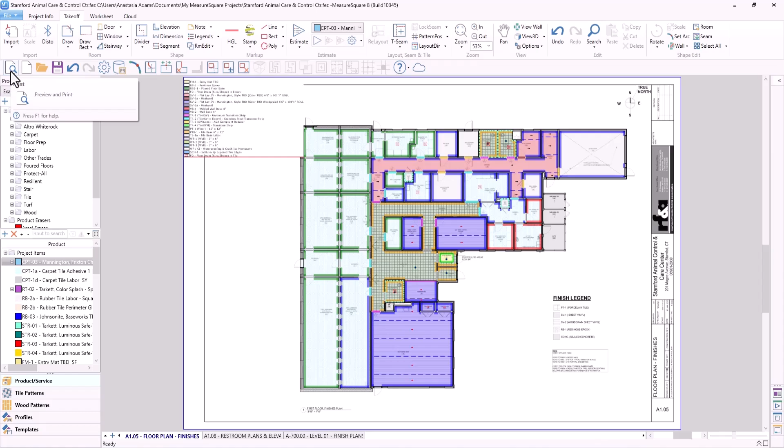So as you can see, I'm in the same animal control project that we've been working in. We want to start with making sure that everything is perfect on our takeoff. We have a legend, so the install crew knows exactly what each of these colors mean, what it is, what size it is. And then once we've verified those things, all you need to do is either navigate to the print icon in your toolbar or come up to File and select Print.

This will open up your print options, and as you can see, you have several options. One thing to note is up here in the upper right hand corner, we have a couple of options. This is what's called a print profile. So if you find you like a specific layout for either your quantities or your diagram or your proposal, whatever sort of printout you want, you can save that as a print profile by clicking this blue plus.

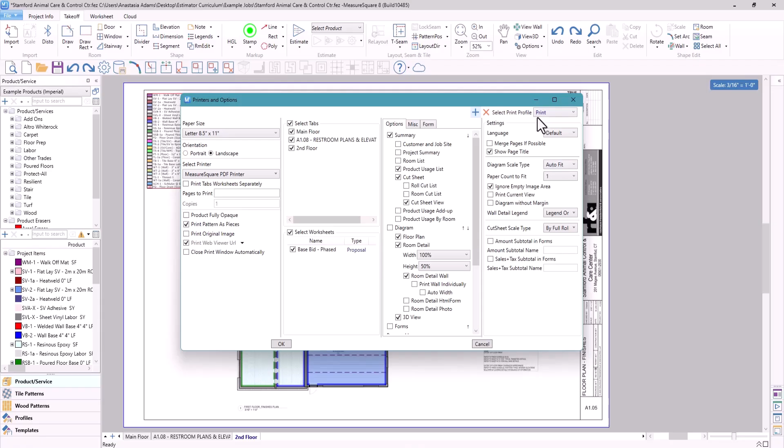I'm going to call it print, and I'll say OK. Now it is in the print profile. I can change my paper size to whatever size I want. If I wanted to print this out at the native scale, I might start with an Arch E and see where that lays out. If that's too big, I can narrow it down to a smaller paper size. If I want this to be nice and readable for somebody in the office, maybe I want to choose an 11 by 17. Always going to recommend a landscape orientation so that you are mirroring what you are getting from your architect.

For the printer, highly recommend always printing to the MeasureSquare PDF printer. This is to ensure that you are getting the crispest lines, the darkest text, all the things necessary for the output. From there, print the created PDF from MeasureSquare PDF printer to your physical printer. This will ensure there are no issues with printing.

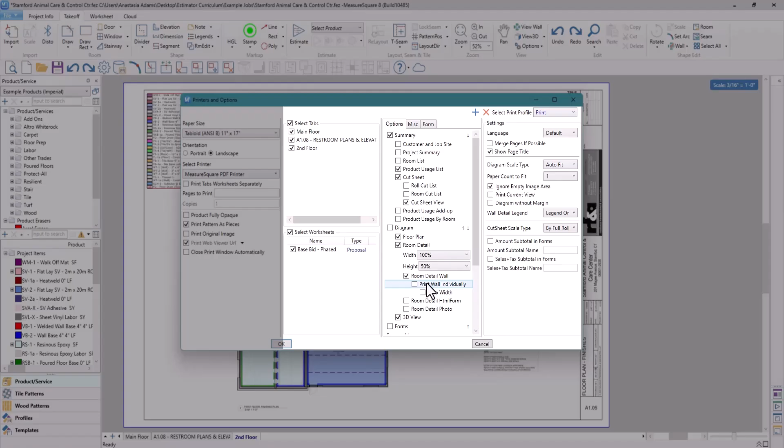So once I've gotten all of my setup the way I want it, I've turned things on and off accordingly. I can go ahead and click OK, and the system will give me a print preview. This is to ensure I am printing exactly what I want to print.

Now, notice I have no drawing. If I go to printers and settings within the print preview, notice it pulls up all of the same options from what I had in the previous view. This is to allow any user to adjust on the fly specifically what they need or want.

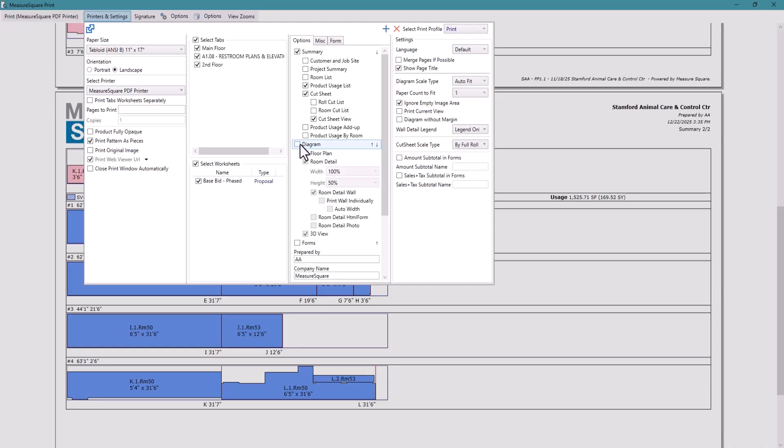So if I want the diagram, I'm going to check diagram. Notice I currently have floor plan, room detail view with room detail wall, and the 3D view all currently checked, but notice how they are gray. That is due to a hierarchy of options. When I turn on diagram, all of these checkboxes will become live. Same thing with room detail wall. If I turn off room detail, notice how it grays out all of these options. This is part of the hierarchy of options that we have here within the system.

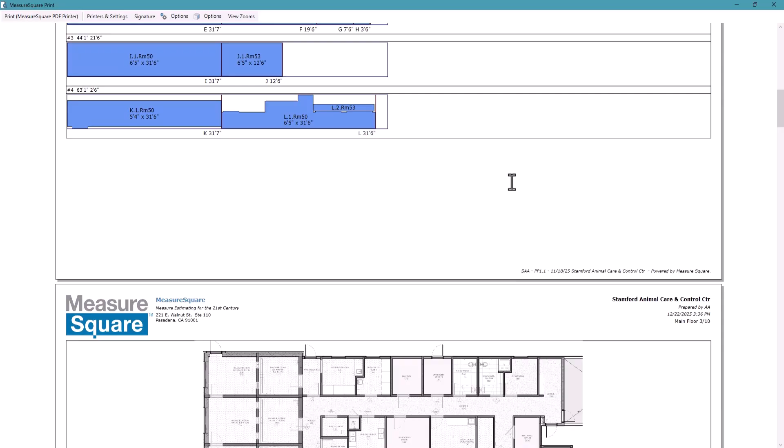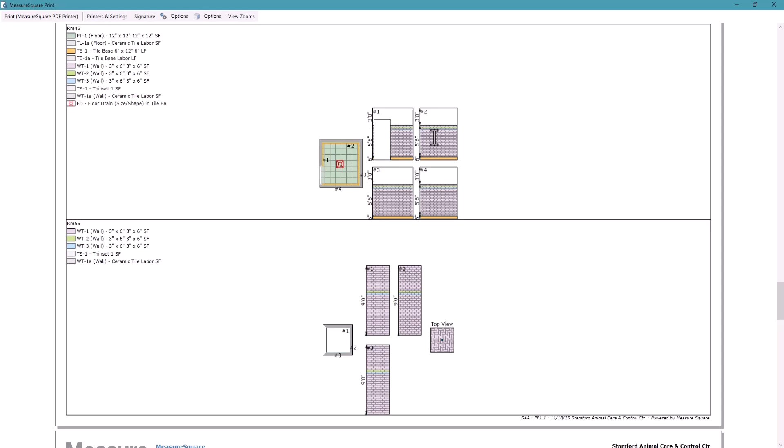So if I scroll down, notice here's all of my tabs. I have the floor plan and the 3D view since I have nothing applied to the walls. Here is another tab of information that I have - again, the floor plan. Here's my room detail view with my floor plan, small walls outlined. Here's my walls exploded - this is my room detail wall, along with a legend. This is part of the wall detail legend option here.

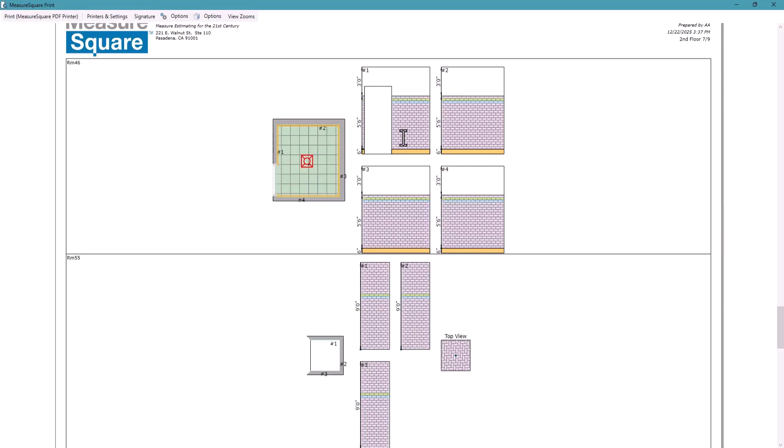If I change this to legend usage, it's going to provide the usage quantities for these materials. Vice versa, if I turn this to none, notice it gets rid of that legend, makes my drawing a little bigger, but it doesn't specify what any of these materials are. So for me, I think legend only is the perfect option because it tells the installer what products go in here, how big they are, where they go if it's floor or wall.

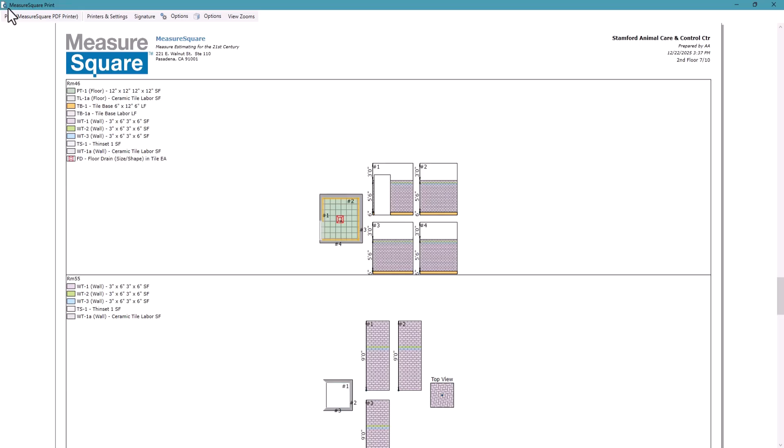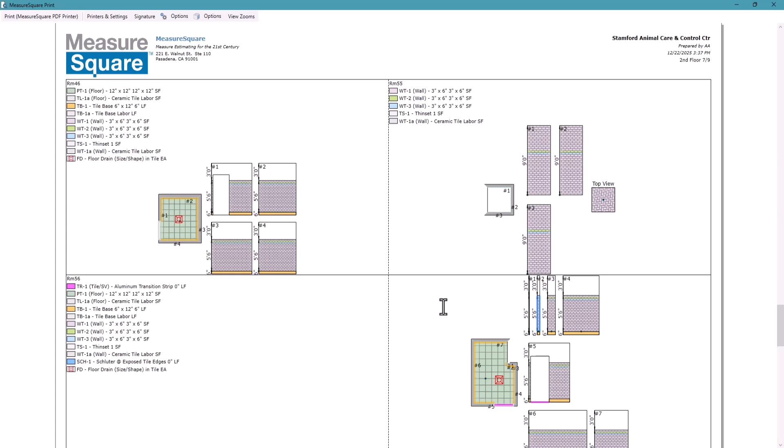But you can see that it made it 50 by 50, right? 50% wide, 50% tall. For me, I like 100% width, 50% height - so I'm getting 2 rooms. It's very clear which legend goes to which walls. It just makes it nice and clear.

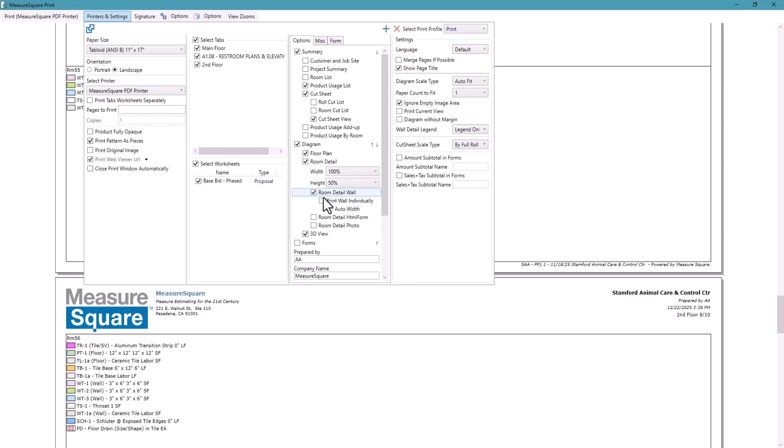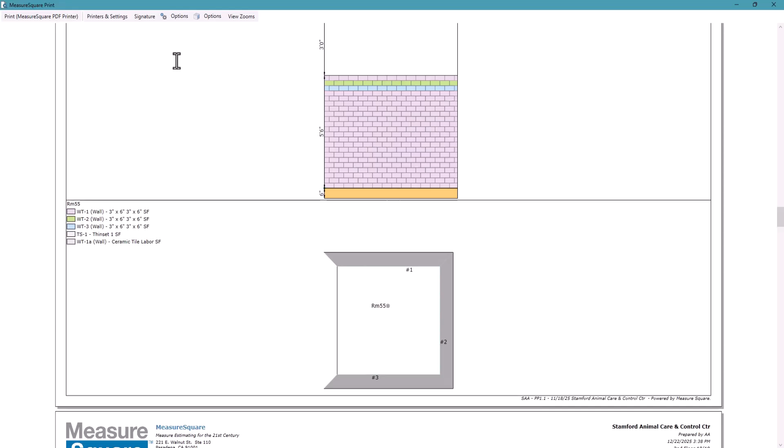Next, this option here prints a wall individually. Some folks like this, but me personally, I do not. I feel like it gets a little convoluted. If I turn that on, it makes the walls nice and big and clean. You can really see the wall stacks for either. But then you get into something like this, where you have one floor plan for room 55, whereas this wall is for room 46, and it can be misconstrued as far as what wall goes to which room. So I like to keep that turned off.

And then we have all four walls with their wall stack heights kept with the floor. Here's where we can select our tabs. Since I don't need the main floor or the wall legends, I only need the last tab, so I'm only going to select that one. I also do not want the worksheet, so I'm going to uncheck that.

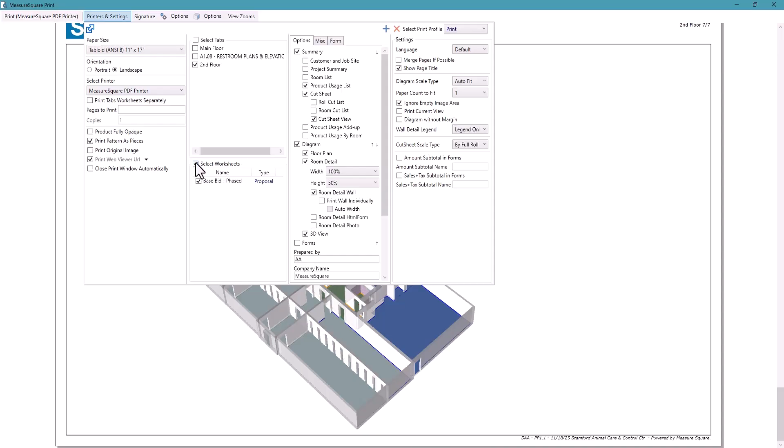What that's going to give me is, if I scroll all the way up to the top, my summary, my sheet view, my cut sheet in full rolls. Now, how do I get this set up?

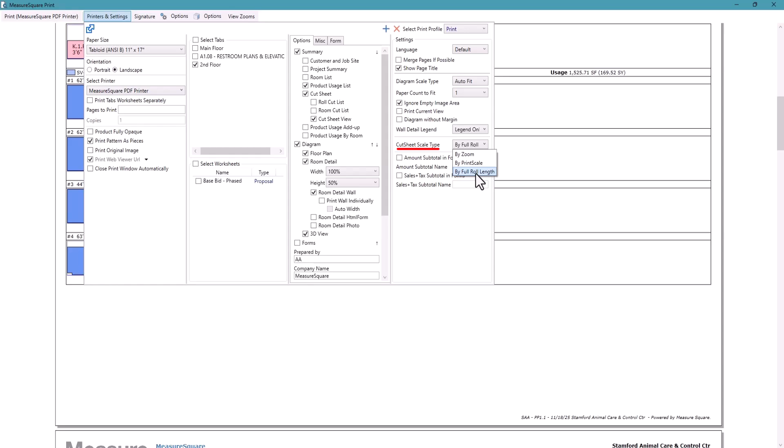Great question, glad you asked. So over here under cut sheet scale type, this is a new option. If I choose by full roll length, the system will isolate each roll on its own line. This is to remove the cut off roll.

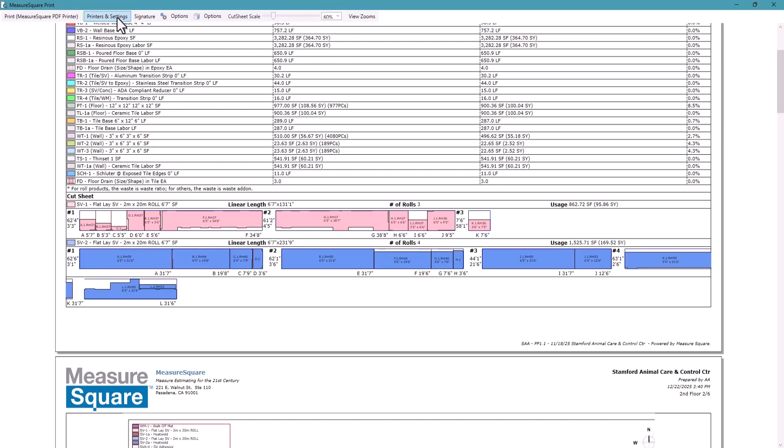If I change this by zoom, this is the old view. Notice how this roll is cut off, and then here is the balance of roll 4. We changed that so that way we can now have full rolls in each line. Also, for most instances, it will make the view larger, therefore making it easier to see.

This upper part is going to be part of our summary. This is what's called our product usage list. We can also turn on the customer and job site information, the project summary. What is this tab called? How many rooms are drawn, how many stairs are drawn, the total amount of net floor area, the total amount of net wall area, the total amount of base perimeter, the number of doors, and the number of windows placed within this drawing.

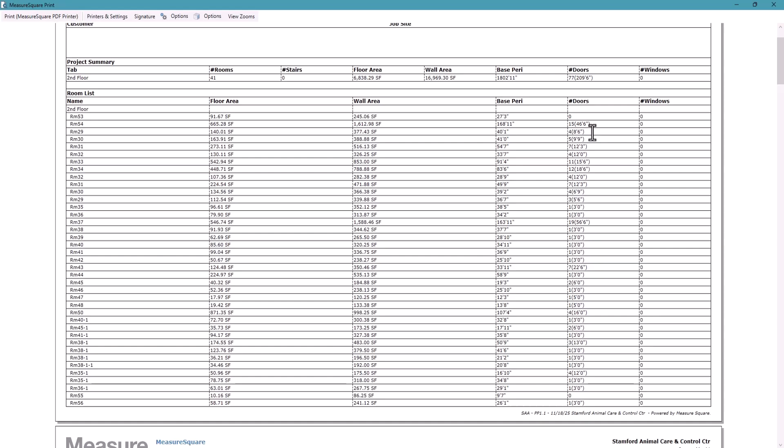Next we have a room list. If you are one of those folks that labels your rooms, this would give you very specific information about each of these rooms, how big their net floor area is, how big their wall area is, base perimeter, number of doors, number of windows. So let me go ahead and turn that one off. We're going to turn off the customer and job site, and we're going to turn off the project summary. That gets us back to our original view with our product usage list as well as our cut sheet.

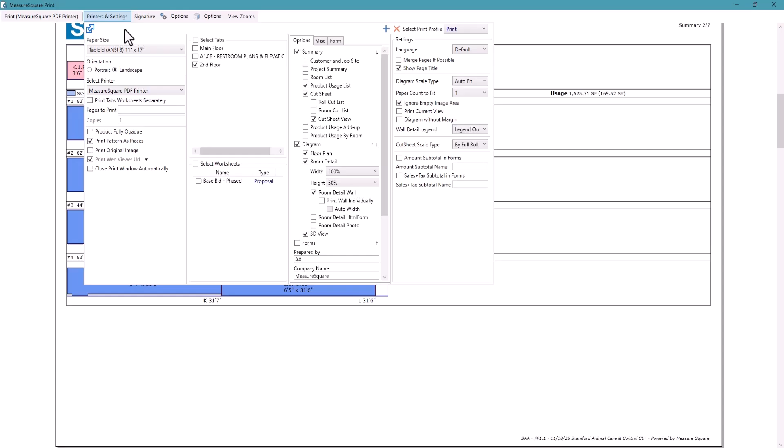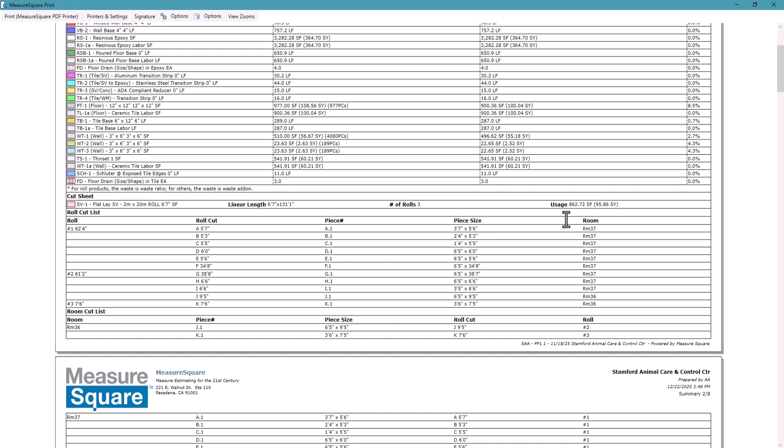Now, to turn off the cut sheet, should you not need this, you can simply uncheck the cut sheet and it will remove it. Within the cut sheet, there are several options, which is a roll cut list and a room cut list. Let me scroll up. Here is the roll cut list, which is roll 1, roll 2, and roll 3. These are the cuts that occur on each roll. This is the piece numbers and the sizes, as well as which room they are attached to.

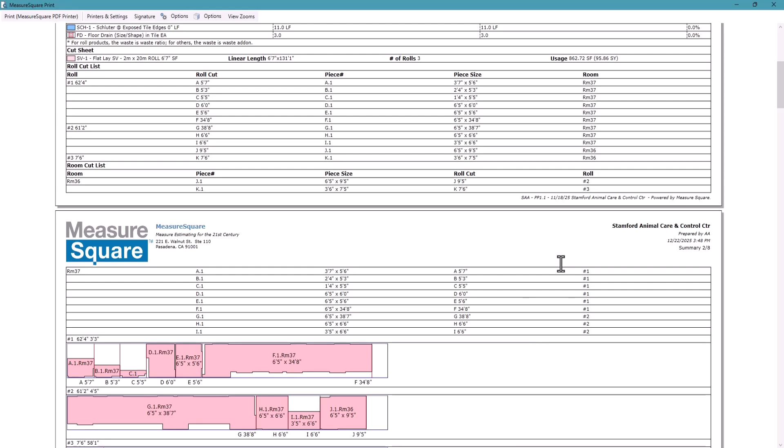Going down, the room cut list has the room, which pieces, their sizes, where they are on the roll, and which rolls they occur on. Same thing for the second room: the cuts that occur, the sizes, which cut they are labeled on here on the roll, and then which roll they occur on. For me, I think the most useful bit of information is this one here, where we can see how the cuts lay out on the roll, as well as the used length for each roll. We've talked through all of the options through the cut sheet of the summary.

The next option is product usage add up. Should you have multiple tabs, you really want this turned on because this gives you project totals, if you've told the system to break out the quantities by tab. If I turn this on, it's not going to do anything for us because I only have the one tab selected and I only have products on the one tab.

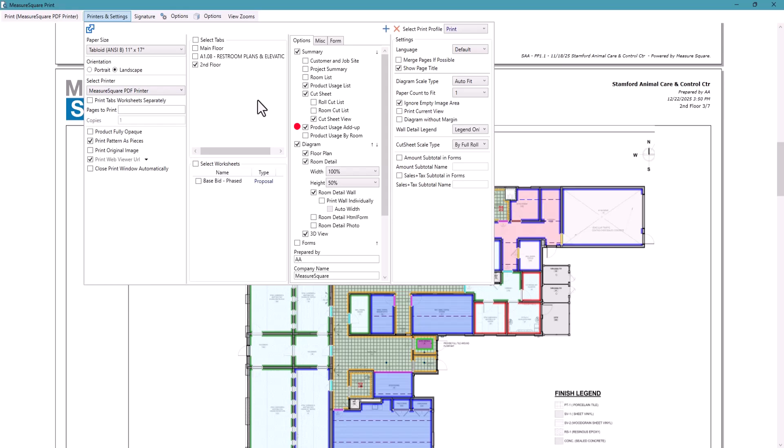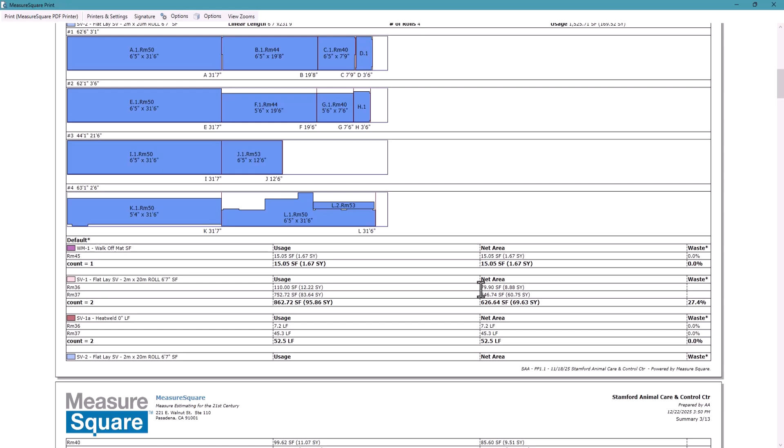And then product usage by room, I will turn that on. This is really what it looks like. So you can see walk-off mat occurs in room 45. Again, had I labeled my rooms with the specific room names, it would be very clear where these occur, how much is being used, what the net area is of that specific product, and how much waste. Again, this is the product usage by room option.

So going down, diagram, we have the floor plan, the room detail, which is that small floor plan with the walls exploded and the small legend, and the 3D view.

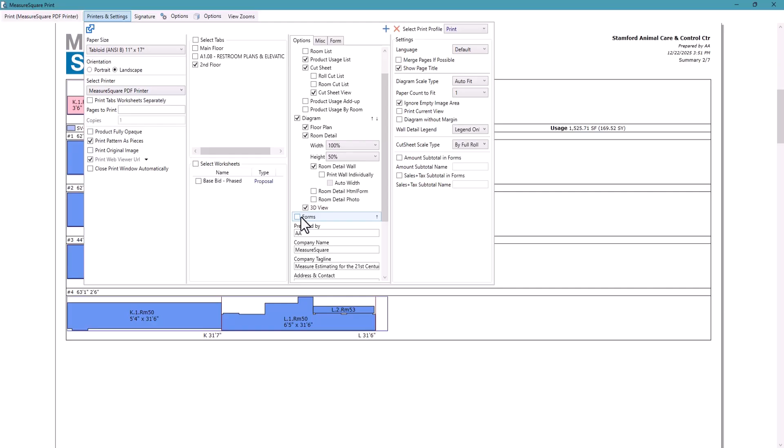Lastly, on this hierarchy of list is our forms. So notice we do have a worksheet here. Should we have a specific proposal or quotation we wanted to print, we could print that all in one go with our summary as well as our diagram all in one go.

At the very bottom of our third column, you'll notice that I've entered some data in here. So prepared by my initials, the company for where I work, the company tagline, the corporate office, as well as a company logo. If I had any terms and conditions, I could enter them here. But please remember that these are going to print on each and every form of this type. The footer I will show you in just one moment.

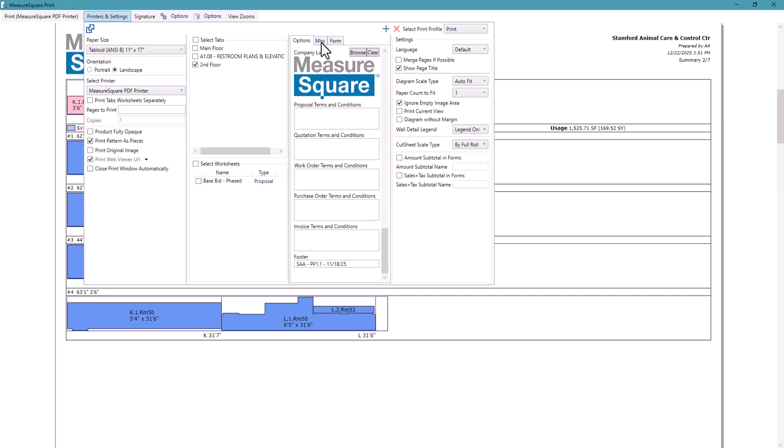Going over to the center tab in the third column is called miscellaneous. We have some options here. So font size, okay, we have anywhere from smallest to biggest, 5 options here. I want to be very clear that this only pertains to the output, it does not pertain to any of the text within the program. If you need the text to be bigger within the program, you're going to have to change that on your computer system settings. So this is only for the output.

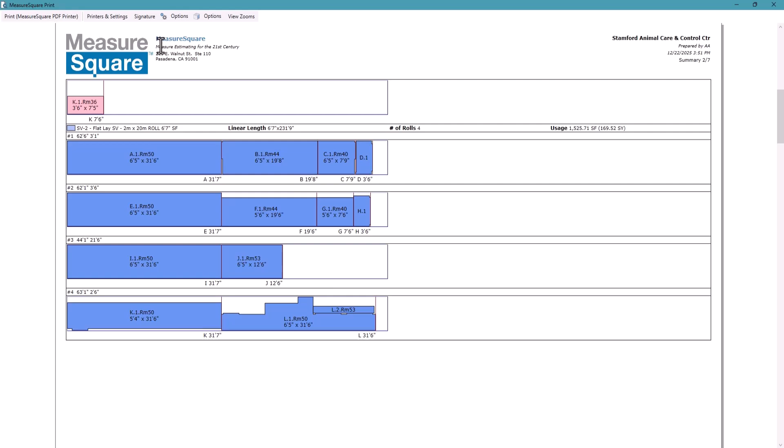Now this option here, show advanced header. Notice currently my header has my logo, Measure Square in blue with the tagline in italicized and then the address. If I uncheck the show advanced header, notice Measure Square and the tagline in italicized. Show advanced header is going to pull in that logo and it will make your company name blue.

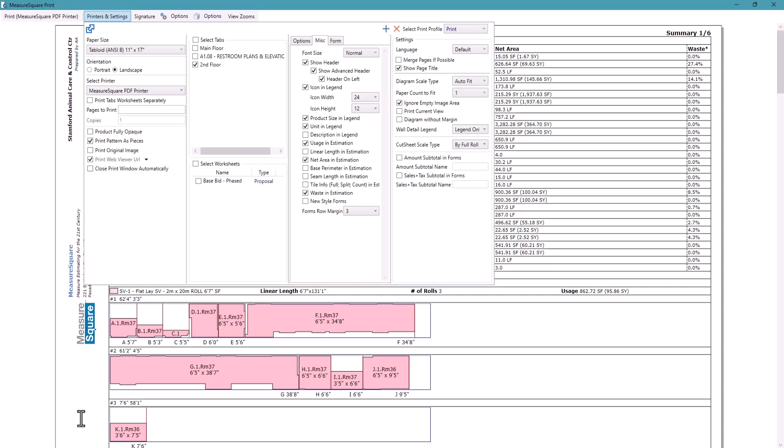Moving on, header on left is going to shift my header from the top over to the left-hand side, similar to a title block, along with my file name and all of the data that you would see along the top here. So icon in legend.

Icon is this colored block over here on the left. You can specify how big those icons are. The product size, unit, description, usage, linear length, net area, base perimeter, seam length, tile info. The tile info is how many full tiles, how many split tiles, meaning cut in half, and how many cut products there are within the estimation, waste, and new style forms.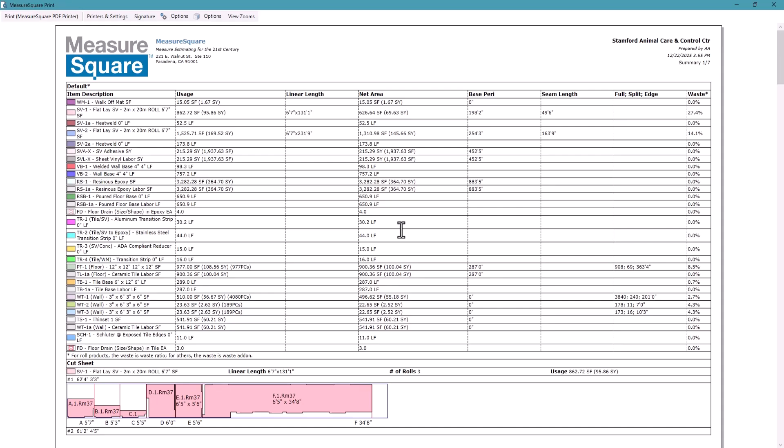So any of these, if I turn them on, we'll add them to your usage summary. Notice here's all of those additional columns. I can then navigate back to miscellaneous and turn off all of these additional pieces of data.

Next is going to be the new style forms. We will go over that in a future module specifically for forms. And then the last tab here in the third column is what pieces of data do you want within each form type? Again, we will go over this in the forms module.

On the right-hand side, we have language. If you want the output to be printed in any specific language, this option here will be able to change that for you. If you want the system to merge pages, if possible, there is a checkbox here. Show page title - if I uncheck this, you can see it turned off that line. What it does is tell you what you are printing and how many print pages there are total for your output.

Next, diagram scale type. I currently have this set to autofit because I'm on a small paper size. If you're attempting to print the diagram out to the native scale the architect gave us, I highly recommend changing this to by print scale and then choosing the correct print scale accordingly.

Going down, we have ignore empty image area. If you are attempting to remove or hide the title block, this is a good checkbox to have checked. If you want to show the full page, uncheck it and it will show the entire plan page.

Print current view is if you want to show just a specific view. Then diagram without margin - this is very important if you have plan pages that are architectural size E and you are trying to print out your takeoff back to that native scale. You have to remove the system-derived margin in order to get it all on one page.

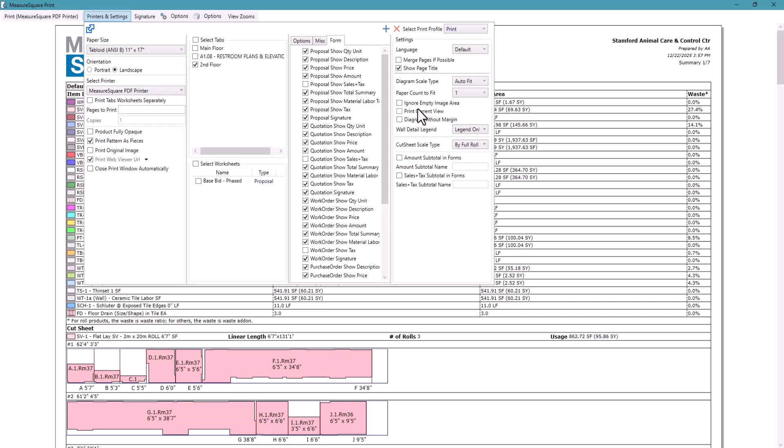Wall detail legend, we spoke about that - that has to do with the room detail view down here, this legend here. Legend only is going to just specify what all of these products are. Legend usage is going to give what the product is and how much there is. None will remove it entirely.

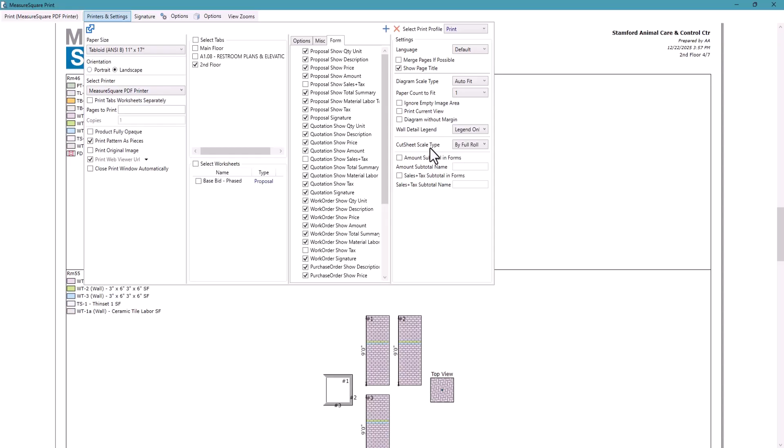The cut sheet scale type, this is for those rolled goods up here at the top. Highly recommend using by full roll. And then the last two options down here have to do with the form and printing the subtotal.

So once you have all of the options dialed into what you are going for, simply pressing the upper left option here, print, will create that PDF for you.

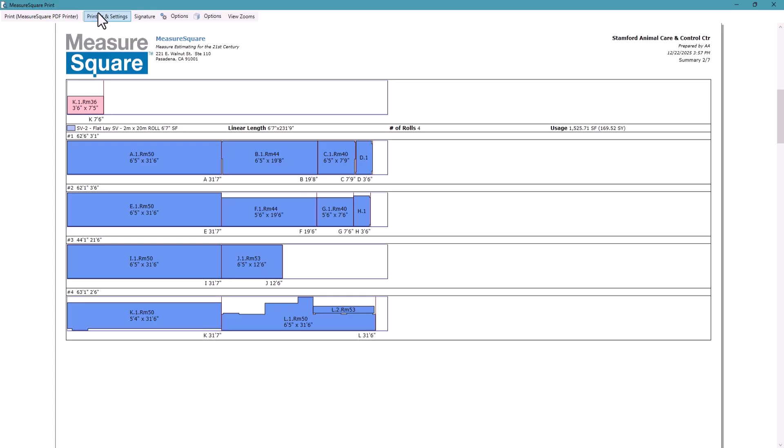And if you want to save this configuration back to your print profile, all you have to do is print. The system will automatically remember what options you had selected, turned on and turned off, and will keep it in this specific print profile. Should you want to change it, all you need to do is change the print profile and it will automatically update those checkboxes accordingly.

Notice too, I have options and then options. The difference between these two is this one is the same as your print options from the takeoff tab. This options, shown with a cube, is intended to show you as the user that this is 3D options - so what are we seeing in 3D? Do we need to turn on and off data points?

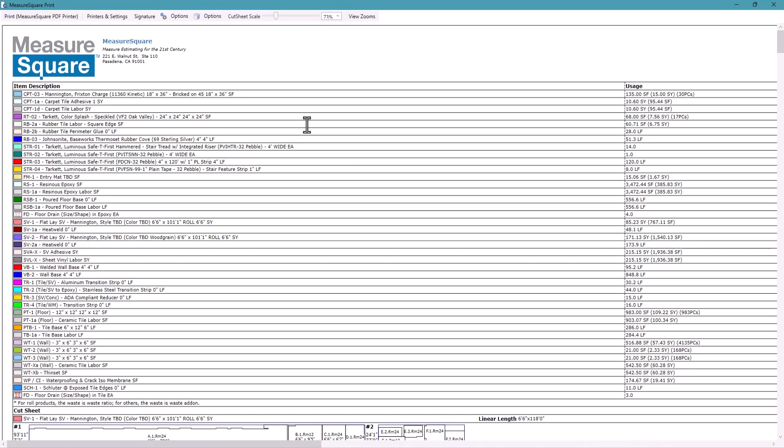Next, we have cut sheet scale. This is that zoom we were talking about previously from our printers and settings, by zoom - the same exact option here. So if I click view zooms and say whole page, it is going to give me the entire page. Notice how small this is on that large format paper.

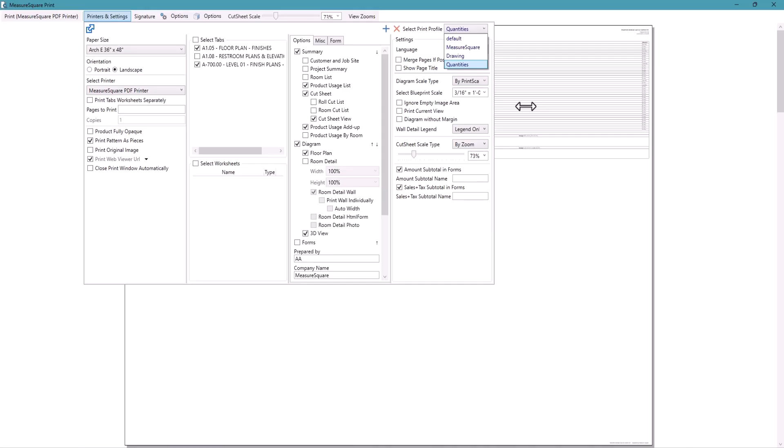This is why I have two options, one for the quantities and one for the drawing. If you have something like this where printing your quantities on a large format paper does not work, all you need to do is set up two separate print profiles. This will end up resulting in two separate PDF pages.

The reason why we would want two separate PDF pages is so we can send our drawing for verification with our proposal, or send this out to the field without the quantities associated. So we are not losing any data in that way.

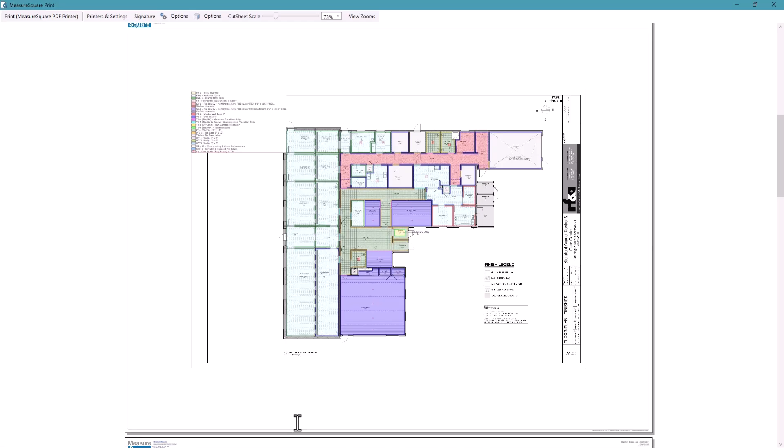Notice that my drawing looks very small. So if that's the case, I need to turn down my paper size. Let's try an architectural D. Ah, much better. But see how now the title block bleeds off to the second page.

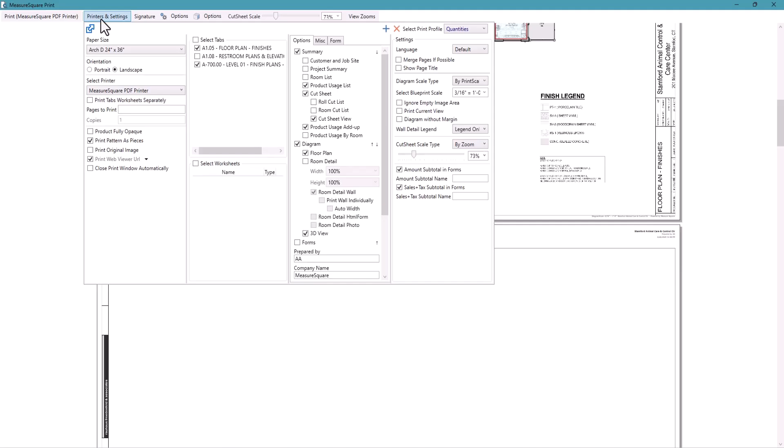So this is one of those instances where diagram without margin is going to be the correct answer, because now we have our drawing that fills the entire page and we don't have any bleed off. But we still have the margin on our quantities and we still have the margin on our 3D view.

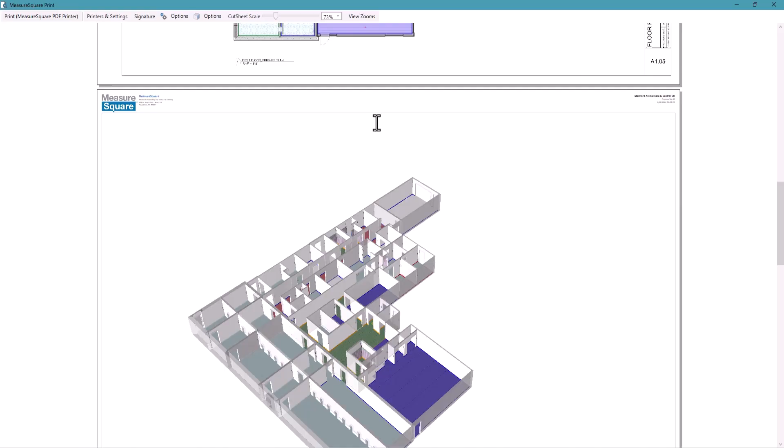If I scroll down, here is our second floor with our entry set at a 45, and we have the 3D with our staircase. I hope this helped answer questions regarding output and how to get this right.